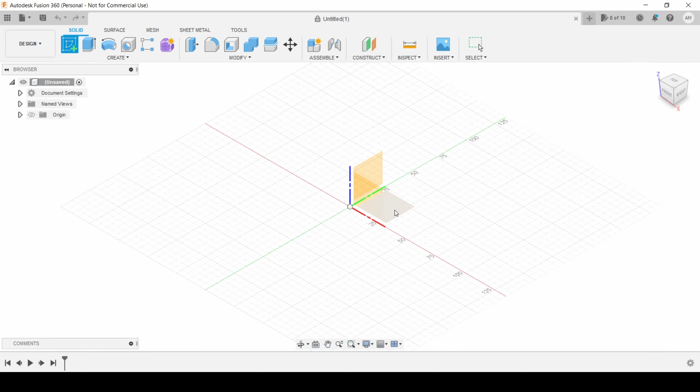Alright, so we're going to start with our drawer. We need to make a new sketch on the bottom plane, and make a rectangle, 780mm wide. Hit the tab key and 600mm from front to back. Bring that over a bit, zoom out, and finish the sketch. Now I'm just going to rotate this a little bit towards the front.

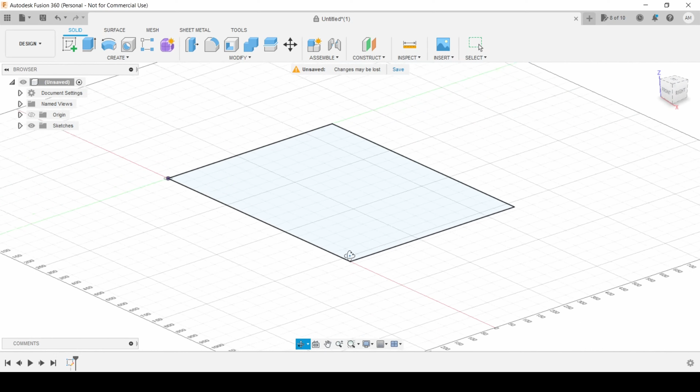We're going to extrude that to 36mm because I'm going to be using two 18mm thick MDF panels glued together to make my entire drawer. Hit enter on that one.

Now we can create a new sketch and select the top of the drawer. This is where we're going to start designing what we want in our drawer. Now you can make this exactly however you want, but I just know how I want my layout to be.

I know that I want pockets to hold all of my CNC bits still in their cases. I have normal sizes, some longer ones which are the same size as the smaller ones, and then some bigger ones altogether. I also want somewhere to have my keyboard and mouse down the front here, and then I'm going to be putting a spanner, my calipers, and the two spanners to take out the bits from the router. And then I'm just going to fill in the rest with some pockets here and there.

So I know that I want to start off with a 50mm border around the outside. I think the way that I want to do it, I'm actually not going to end up with 50mm all the way around, but we'll see how we go.

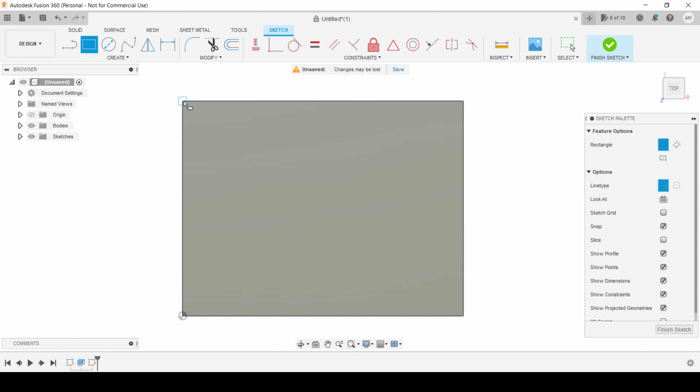So I'm going to select the rectangle, come over to the line type and click construction, and then make a rectangle which is 50 by 50, which was already there, but for some reason I decided to replace it. Now that I have that, I can create another rectangle.

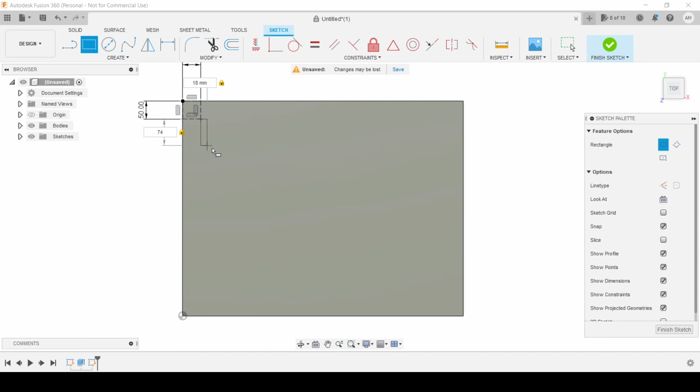We'll get rid of the construction lines, and we're going to make this one 18mm wide by 74mm long. Keeping in mind that this is actually for the cases that I have, you might need to make adjustments to how long and wide yours are. So I'm going to hit enter with that one, and then we can just click finish sketch for now.

I'll zoom in a little bit. So I'll extrude that to -8. And then over here we want to make sure that it says cut for the operation. Click OK.

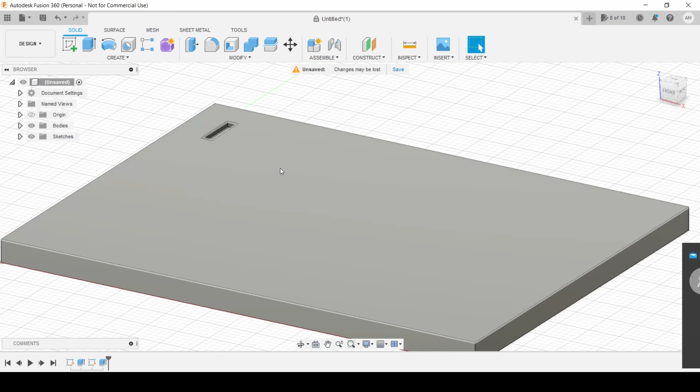Alright, so now we want to create a grid pattern of these pockets. We're going to come up here and click on a rectangular pattern, change the type to features and select the pocket. Now we're going to go directions, I want it to go this way and down.

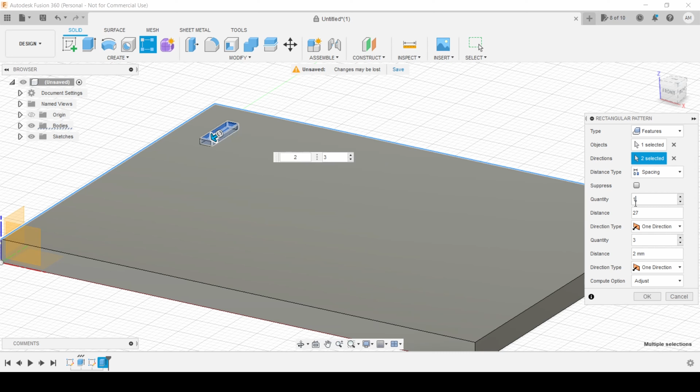Then we're going to go spacing for the distance type, and make the distance, so you need to add how much we want between each pocket and the width of the pocket. So 18 plus, say, 9mm between each one will be 27. And how many of these do I want to add in? Let's say 10, no, let's go 12. Yep, 12 looks good to me.

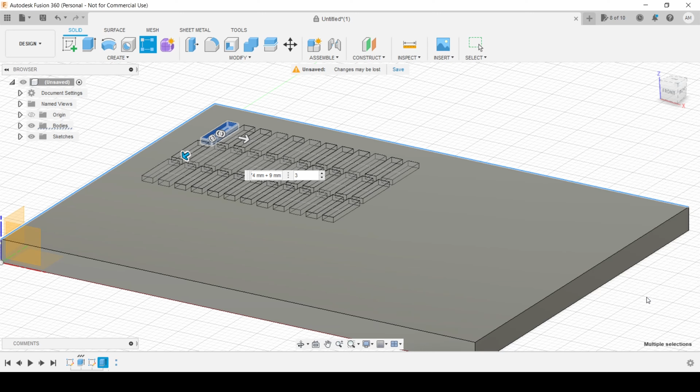And then we'll go 3 this way. And then again, we need to add in the length plus 9, so 83. You can also just go 74 plus 9, and click OK. And that gives us a grid pattern just like that.

So now we have our grid pattern of pockets. Now we want to make some longer ones of these pockets just here, because I have some cases that are the same, but the bits are longer, so the cases are a little bit longer.

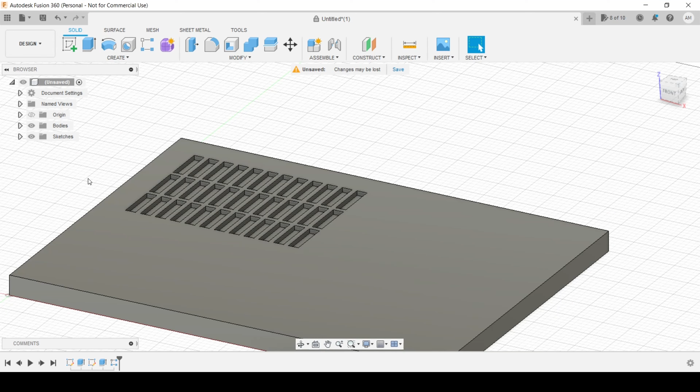So what we do now is we're going to create a new sketch and select the top, and then we want to follow the same line across the top. So I'm just going to get a line, we'll go construction line, and we're going to add a 10mm gap between those two and hit enter.

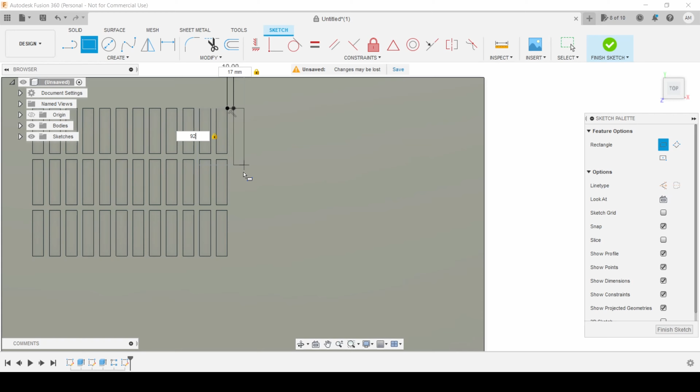So now we're going to go rectangle, get rid of the construction line, and then we can make a rectangle just like we did before. These ones are actually a little bit thinner, so they're 17 millimeters wide, and they're going to be 92 millimeters long. We can hit enter for that one and finish the sketch.

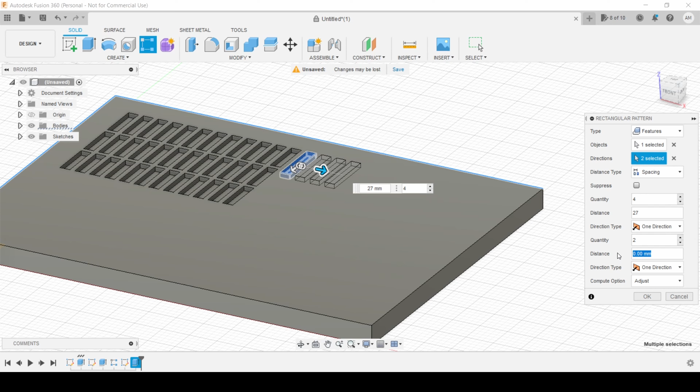Now again, this is a lot of repeating of the same process, so we're going to go -8, make sure the operation says cut, click OK, and make another pattern. Okay, so now we have those few there for the longer bits, and now we're going to add in some bigger pockets.

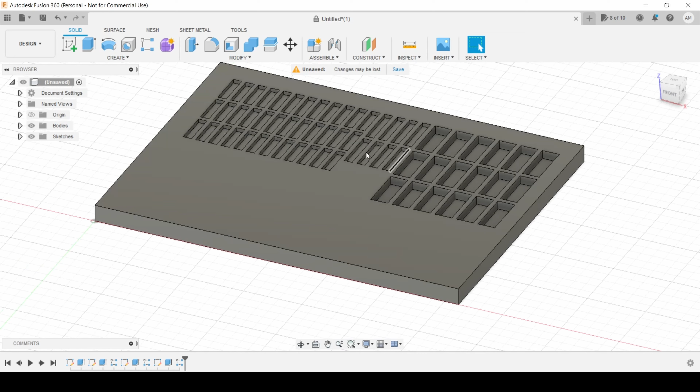Okay, so now we've done that, we're going to add in some pockets. So again, repeat, we're going to create a new sketch, and I'm going to create a couple of pockets, and then we can skip forward a little bit.

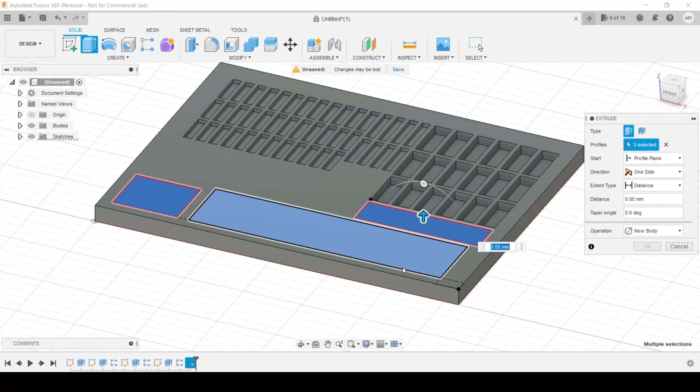Now if I hold control when I select multiple rectangles, that'll let me select all three at the same time, and then I can go minus. I'm going to go 20 down for this one, and click cut, OK.

Okay, now comes the fun part. So I've taken a few pictures here with a spanner next to a tape measure, which I always do at the 10 centimeters just because that way I know it's going to be correct. And that's going to tell me how big the spanner should actually be.

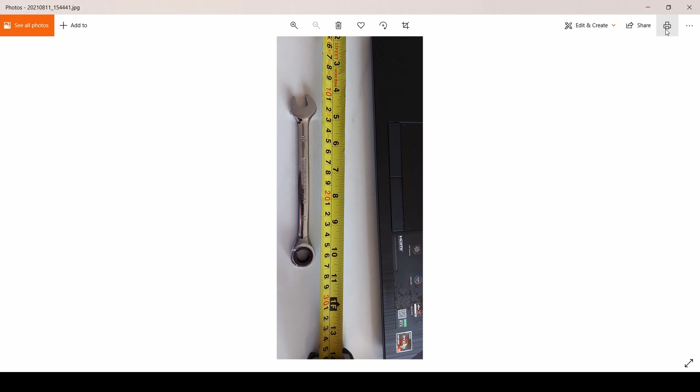So if we come back to Fusion 360, we go insert canvas, insert from my computer, and we'll click the spanner. And then we just want to click the top face because that's where we want to have it. It's already facing the correct direction, so we click OK.

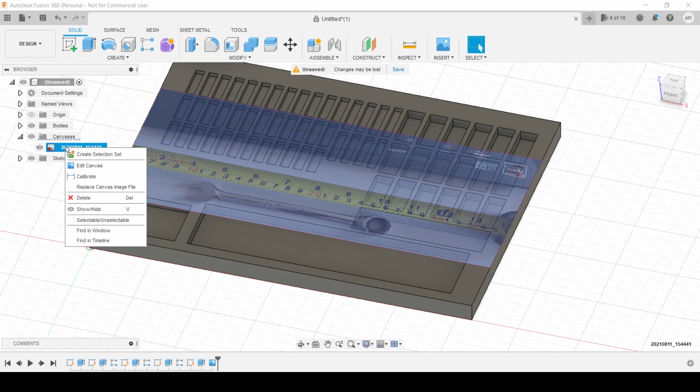And then what we want to do is come over to the canvas, click on the little arrow, right click and go calibrate. Let's make it so it's the top, zoom in a little bit, and we go to the furthest point of the spanner, which is about here to here.

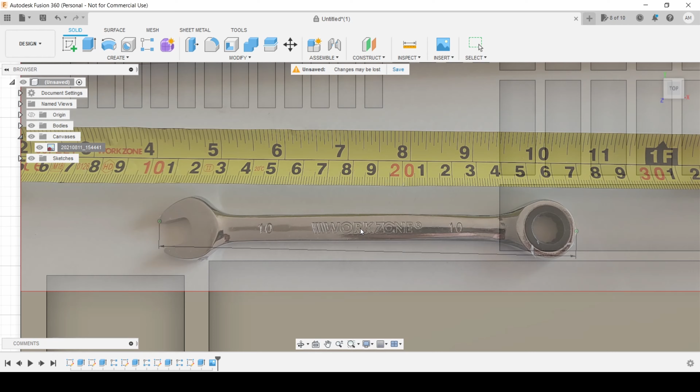So now we can see with the tape measure here that it should be roughly about 170-ish. So let's change that to 170 and click enter. So that's going to shrink it down to the correct size.

Now we can click on the canvas and go edit canvas, and then we can move it to where we want. So I'm going to put the spanner over here.

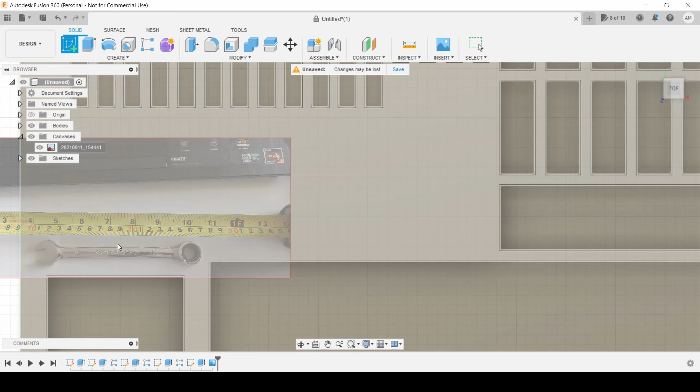And then click OK. So now we want to go to a new sketch, select the top here, and then we're just going to trace around the spanner.

Now, the thing with a spanner is that you don't actually really want to trace it inside this little section here. You just want to make a circle because it's going to be too much of a pain to try and make it fit perfect.

And in all honesty, having just a circle on this end is actually going to be beneficial because you can use this little opening here to use your finger to pull it out.

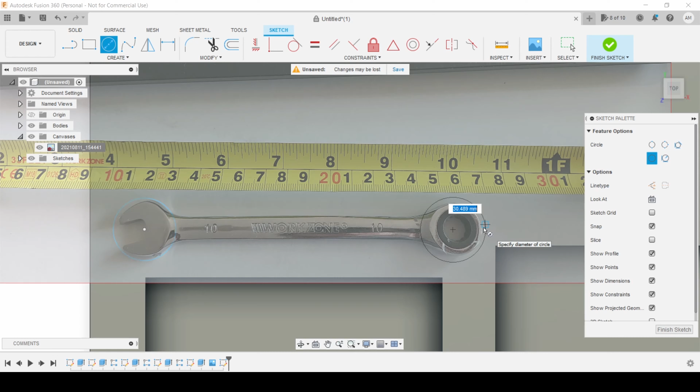So I'm just going to select roughly the middle, we'll make a circle that's big enough, about that. Get another circle and we'll put one on this end, should be about that'll do. And then we'll get some lines and we'll just go like that.

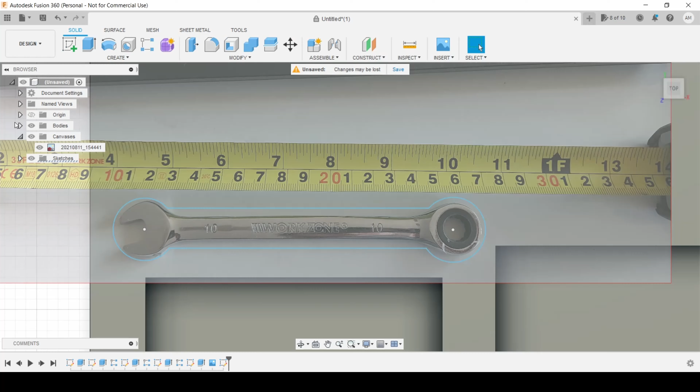Another line here, like that. And then we're going to get the trim tool, and we'll trim out this little section here, and then click finish sketch. Now we can hide that canvas, we don't need that anymore.

And we're going to rotate this so it's easier to see, and then we can extrude this down, let's say 8 millimeters, that's about deep enough for the spanner, and click OK.

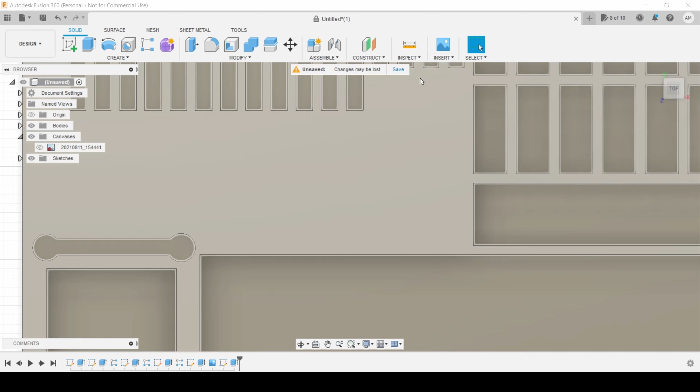So now that we have that spot for the spanner, we're going to come over and I'm going to insert another canvas, and we will do the spanners for the router.

So we're going to again enter it into this space, insert that canvas, click OK, and again calibrate, select the longest 2 points, just like that. And this one is about 190 long, so we'll go 190 and hit enter.

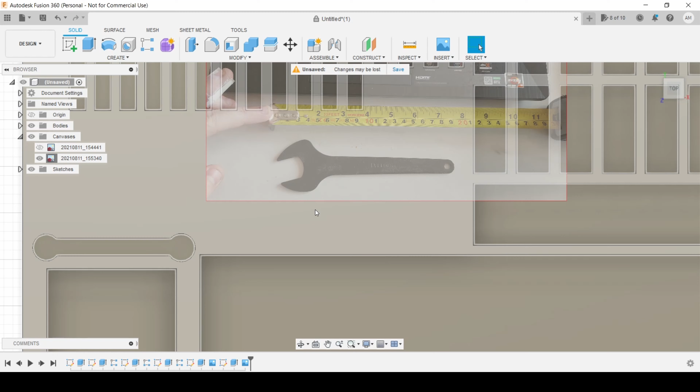Now the thing is with this spanner, this is the bigger of the two. The router actually uses 2 spanners, but the little one will fit inside the pocket on top of this one, so I'm not concerned about modeling that one as well. So now we're going to go edit canvas.

I actually want this one to be around the other way, so we'll go 180 degrees, and we're going to bring it down roughly about there. Will do, and we'll click OK.

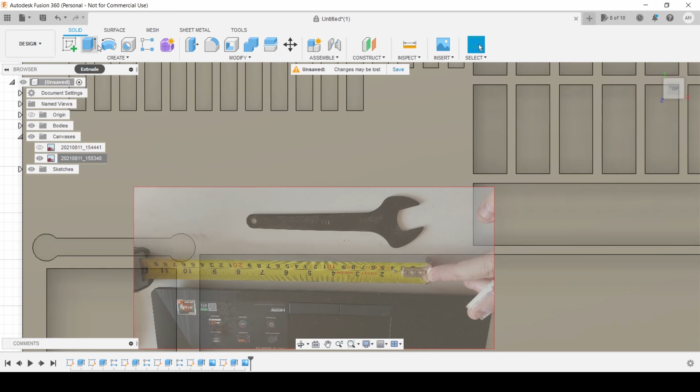Now we're going to create a new sketch on top of that, and we'll trace this one out as well. Now this one I'm going to actually make it a bit more correct to the spanner. What we're going to do is get some straight lines and some curved lines.

So we're going to come up here and we're going to create a conic curve, and we'll come down and then we can stretch it to how we want to get the correct shape.

So that needs to be moved over a little bit. Put that second point in the wrong spot. Bring it down. How do we want it? Like that. Yep. Create another conic curve.

Roughly like that. And then we'll get another one. Go down to the point here. Curve it just that little bit. And I am actually going to follow this around.

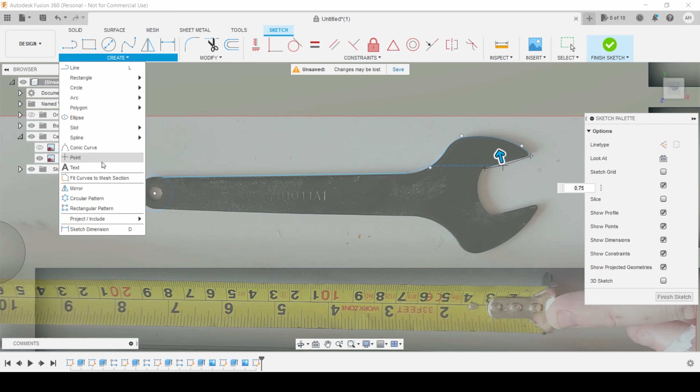Now we need to keep in mind how this is actually going to fit. At the point of going inside here is better, because that's going to make the hole bigger and make the spanner fit better. On the outside you want the lines to be outside, so you want everything to be outside the spanner and nothing over the black. I know there's a little bit here, but I'll fix that up in a minute. And then we're going to keep following this around.

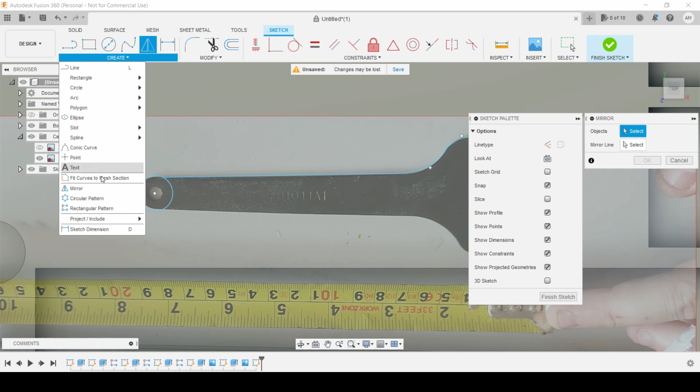And then we'll finish it off with a line. Okay, we can come up here and we can cut this part out, and that gives us the general shape of our spanner. Okay, so there we are.

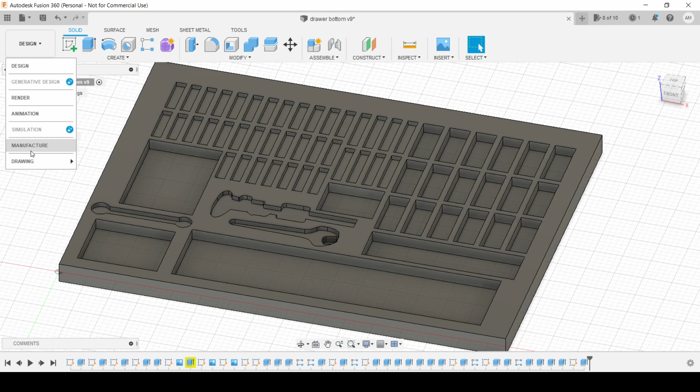What we want to do is come over to design and click on manufacture. First thing we need to do is create a setup, and the machine doesn't matter. If you have your machine set up in Fusion, you can add it in here. I never do, I just leave it blank.

Type is milling, and then I need to set my box point to this bottom corner, and the model is the body. We're going to come over here to stock.

We're going to go fixed size box, and it's 780 by 600, and it is 36 millimeters high. The height doesn't really matter because you set your Z probe anyway, and I haven't set anything that's lower than 36 anyway.

So I need to actually change my X and Y axis, because the way my machine is set up, I Z probe from the bottom left corner, which is here to me, which makes my X origin this way. So the X axis needs to go on this one, the Y axis on here.

For some reason you have decided to run away. We'll bring the box point back, and we need to flip that around. That's correct now. So X this way, Y this way, and my Z up and down.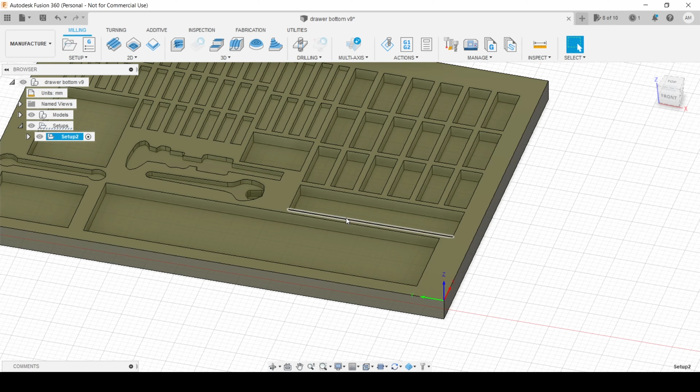So that's enough for that. We click OK, and then we need to create the actual cutting.

So we're going to make a 2D pocket, and this is pretty straightforward. We're going to come into the tools. I have added all my tools into my tool library, as you can see here. I do have a couple more I need to add in, but this is generally what I have. So we're going to go to the 6mm down cut flute and click select.

Coolant, we don't have coolant, so that doesn't matter. Feed rate - now feed rate, I can actually cut up to about 15,000 millimeters per minute. I don't really like that though, so I'm just going to set it to 5,000 because I just think 15,000 is a bit too quick.

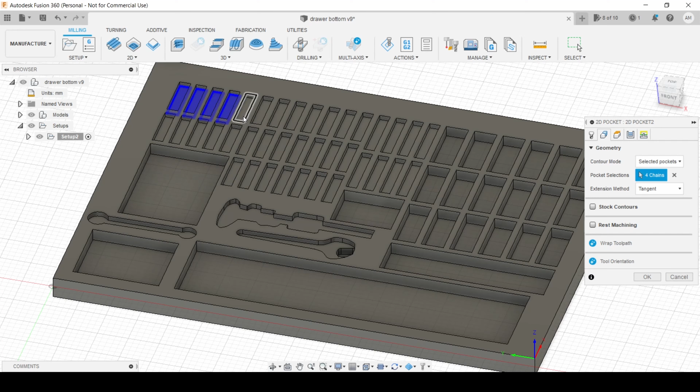Geometry. Now for the pocket selections, we're going to select all the pockets. You want to make sure you select the bottom of every single pocket. And I do believe someone commented on one of my past videos about a way to select all of these at once, and I have forgotten how.

I'm sure if I went back and read the comments I could find it, but I'm lazy and can't be bothered right now. But if you go check out my last video, which will be linked up above right now, then you'll see the comment of what they were talking about.

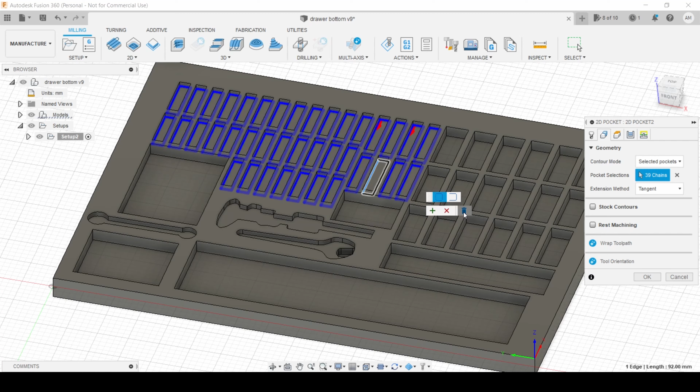As you'll see, I just selected the wrong spot here, so I'm going to come back and click the red box and then click the little trash can there, and then we select the bottom again. So now that we have all of those selected, we're going to come over to heights.

Now heights I don't really touch for a project like this. That's more for different sorts of projects that I've played with in the past and we'll have some videos on shortly, but I don't usually touch them for a project like this.

I'm going to come over to passes, and we want to make sure that we're set to multiple depths. Usually you'll have stock to leave selected already, so I usually turn that off because we're just creating pockets. We don't need to leave any material at the bottom. And multiple depths I want to turn on.

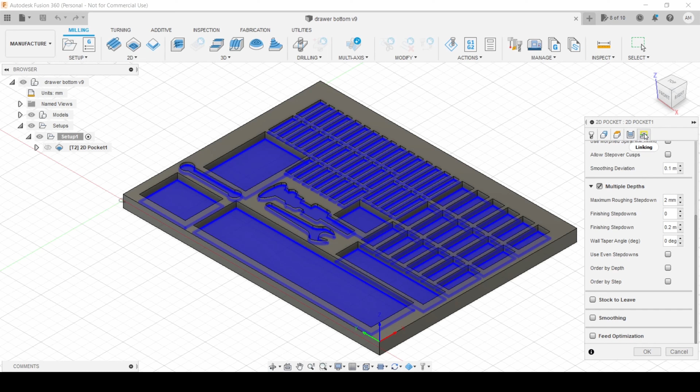This is generally turned off as well. And we go 2 millimeters down at a time. I think with my bit I can go down to 3 millimeters at a time. It's too much for what I like, so I just change it to 2 millimeters. And then linking we just leave as is and click OK.

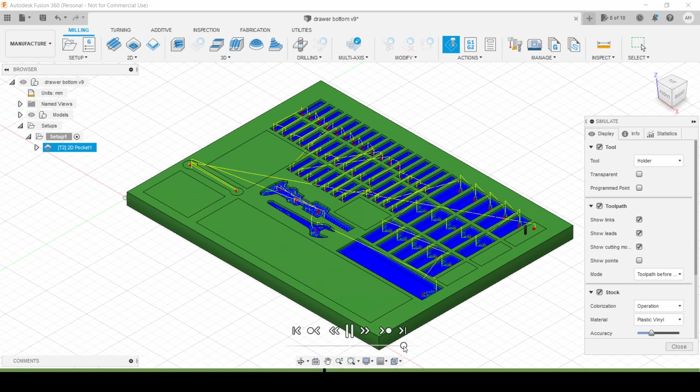Now that's going to create this toolpath, and you can come up here and click simulate. If we click simulate and slow it down a little bit and click play, it's going to show you how it's going to cut it all out. You can use this little thing here to change the speed, make it really fast. We also want to make sure we do this every time we create a toolpath, just to make sure there's no issues and that it's going to cut correctly.

So we can click close over here, and now we need to create the G code. We're going to right click on here and go post process, click post, and then I have a folder that everything goes into, and we're just going to change it to drawer. I like to make it drawer bottom, and I also like to add in what bit I'm using, 6mm bit, and then click save.

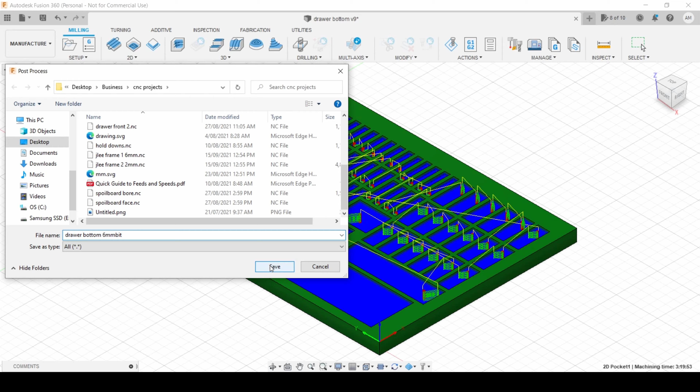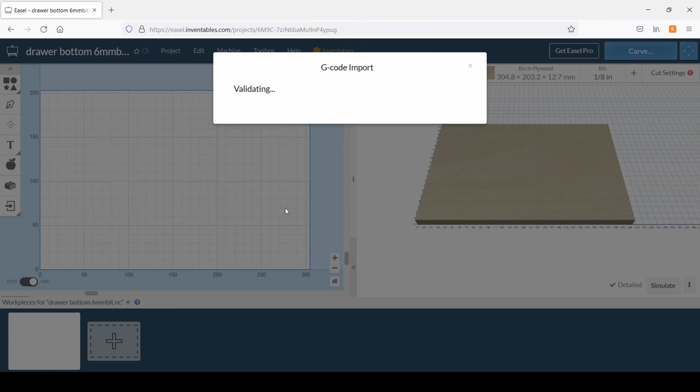Now I want to open up Easel. We're going to open up Easel over here, and then we're going to create a new project. Now that we have the new project, we're going to come up here and click on project and click import G code. We'll click browse, and we can go to where the bit is and click drawer bottom NC, drawer bottom 6mm bit. That's the one we just created, and click open. And there we have the cutting path for the CNC.

So now we're going to go over to my computer and CNC and create the actual drawer bottom.

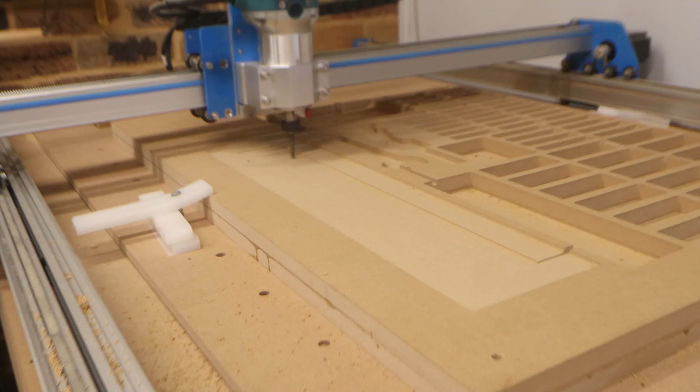Now we're at the CNC with the drawer bottom in place. We can just let the CNC do its thing.

I've always been intrigued with flocking and decided to give it a go with this drawer. I did this for 2 reasons: one, because I wanted to learn how to do it, and two, to add a little bit of protection to my tools, including my calipers and any bits that don't have a case. Flocking was really fun and honestly super easy. I bought everything I needed online, which was glue, the flocking material, and a flocking gun. The process is simple: apply glue where you want the flocking and then use the gun to apply it. The glue does dry pretty quick, so I had to do this in sections. This also reminds me of when I was a kid and we used to make art with glue and glitter. I then left this overnight to fully dry and used a leaf blower to blow off the excess.

Using a straight edge and a circular saw, I cut the drawer to final dimensions, as I used a bigger block than needed on the CNC. This way I didn't have to line everything up perfectly on the CNC. I could then install the drawer with slides.

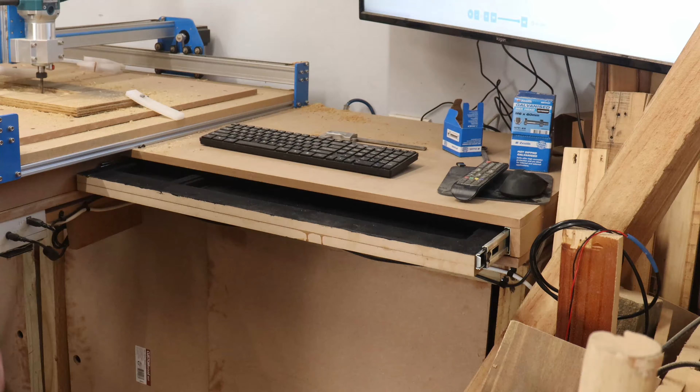Now, when I got my CNC, I made a torsion box for it to sit on, with this wing knowing it would house a drawer. So I installed the slides in this part before adding the top to the torsion box. I used push to open slides. Now I could sort all of my bits and tools into the drawer, but of course, my mouse does not fit.